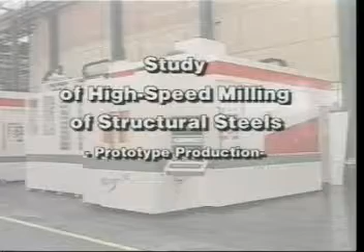Study of high-speed milling of structural steels. The various machining tests performed within the Industrial Cutting Institute with its partners GIAT Industry, PCI SEM, SOF and UMV Valorb enable an economic and industrial answer to be provided to an ambitious project.

Developed for the bulk machining of aluminium aeronautic parts, high-speed machining has asserted itself as an essential part of the process of machining light alloys and metals. Considering the quality of the work, precision, surface condition, residual stress, and of course its productivity, high-speed machining techniques play a leading part in mould finishing and steel press tools.

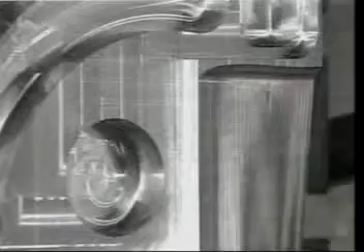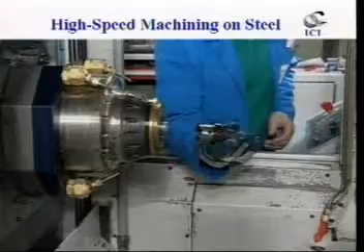By contrast, the bulk machining of structural steels, still representing 80% of machine materials, cannot be achieved through high-speed machining. The ICI development project focused on the definition of tools and their working environment to allow deep cuts at high feed speeds in structural steels from 650 to 1150 MPa.

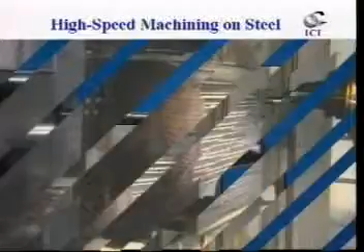Business rivalry between two tool manufacturers SOF and UMV Valorb was set aside before the prospects to be derived from the development of such a tool for their market. The completely new design of the tools is intended for the industrialization and standardization of their form and their dimensions.

The grooving and orbital drilling operations were carried out on a high-speed machining unit, PCI SEM, of the Meteor 5 type with a power of 25 kW at 15,000 RPM.

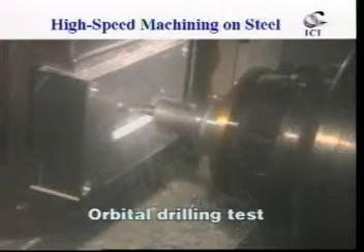For orbital drilling, the drill cutter describes a circle and enters the part spirally. The trajectory is also called helical interpolation. In this way, different hole diameters will be made up to twice the diameter of a drill cutter without changing the tool. A H8 diameter on a 24mm diameter will be attained in one single pass.

Further to the results given by the test, it therefore appears essential to make an economic and industrial comparison of the machining processes on an actual part.

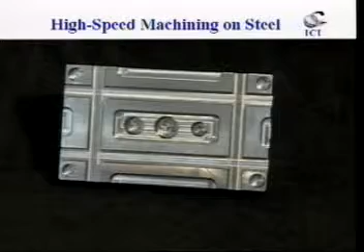The demonstration part made of engineering alloy steel 42CD4, 850 MPa, comprises different drilling operations, including one calibrated at diameter 24H8, milling and grooving operations for roughing and finishing.

The process with the analysis of the operating sequence on a conventional machining center requires the use of 8 different tools. 12 minutes are needed to produce the part.

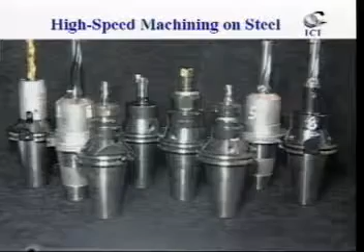The second test is performed on a high-speed machining center Meteor PCI SEM. One single tool, 12mm in diameter, carries out the whole of the machining operations.

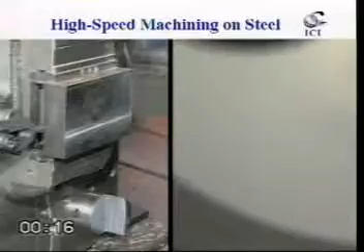The cross-level cooperation between members of the ICI allowed the development of a special single-piece tool, a simple and highly efficient solution as part of the high-speed, rough and finish machining of tools.

The use of one single tool producing such results as far as productivity, precision and surface condition are concerned is only possible through the association of this special tool and high-speed machining. The cutting fluid has been eliminated to have a better view of the operations.

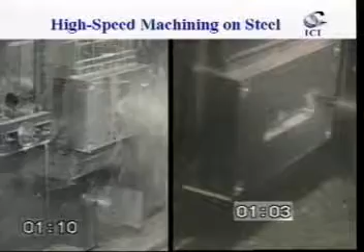In high-speed machining, the single cutter replaces the 8 tools of the conventional machining center, carries out the complete machining of the part for the roughing and finishing operations. The part is wholly produced in 3 minutes, achieving a productivity rate 4 times higher than conventional machining.

This single cutter is going to do the work of a 24mm diameter one-piece carbide drill, a 23.5mm diameter carbide tip drill, a 20mm diameter carbide tip end mill, a 16mm diameter tip drill, an 18mm diameter drill, a 24mm diameter one-piece carbide reamer, a one-piece carbide end mill, and finally a last cutter for finishing the grooves and obtaining the tolerances.

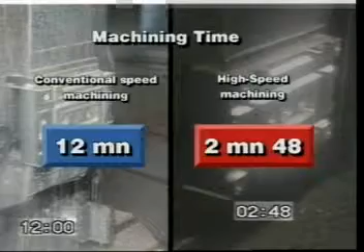The appearance of the finished part emphasises the quality of high-speed machining compared to conventional machining. The surface conditions obtained at high speed are excellent. The average roughness is less than 0.2, edges are sharp and free from burrs.

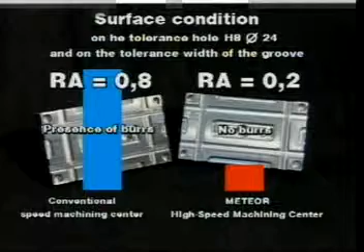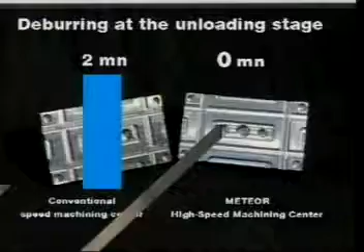The rough machining of steels at high speed becomes an industrial reality with substantial reduction of machining time, an increase in productivity, much higher quality results with clearly improved surface and roughness conditions.

Furthermore, the limitation of cutting stresses reduces part deformation and the use of a single tool reduces the sizes of machine stores. The whole of the promising results of high-speed rough machining matches the objectives that the ICI set itself through the effective and dynamic partnership between member companies.